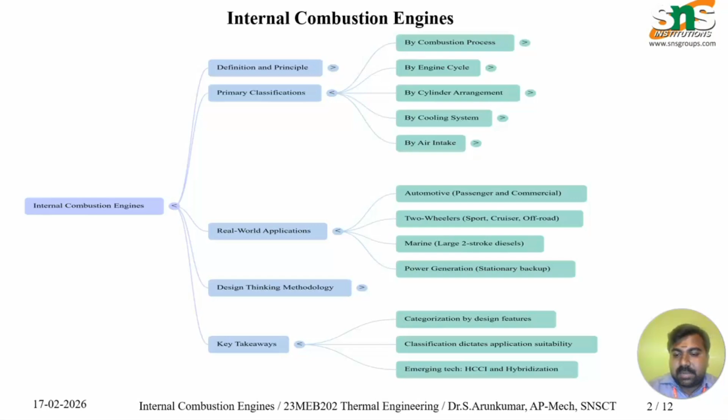And some of the real world applications like automotive, passenger and commercial vehicles, two-wheelers like sports, cruiser and off-road vehicles, and marine and power generation, stationary backup applications. Followed by the design thinking methodology and some key takeaways like categorization of design features, classification dictates application suitability, and emerging tech hybridizations.

So first, we need to know what internal combustion engines are. An internal combustion engine converts the chemical energy from the fuel into mechanical work through combustion within a confined chamber. The confined chamber is called the cylinder. This process generates high pressure gases that drive the piston or rotor, producing rotational motion.

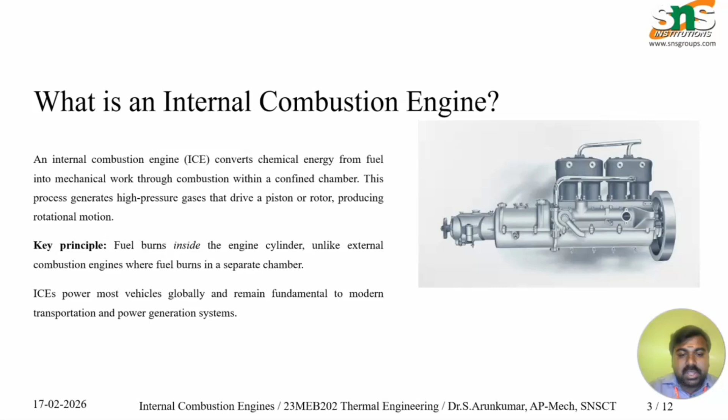One key principle is that fuel burns inside the engine cylinder, unlike external combustion engines where the fuel burns in separate chambers. In internal combustion engines, the combustion takes place inside the cylinder; spark ignition petrol engines and diesel engines are the best examples. In external combustion engines, the combustion of fuel takes place outside the cylinder; examples are power plants and steam turbines. Internal combustion engines power most vehicles globally and remain fundamental to modern transportation and power generation systems.

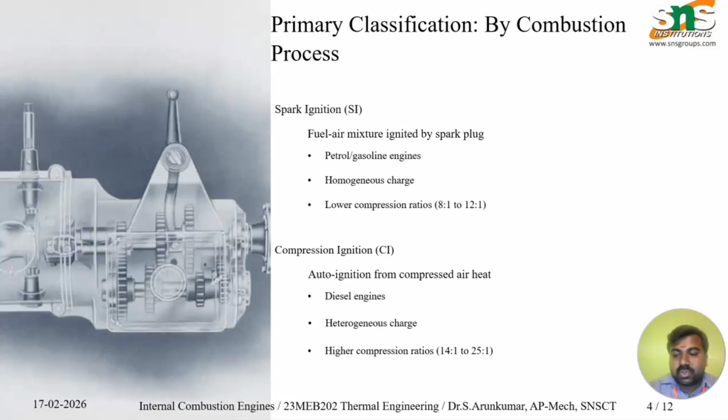Based on the combustion process, internal combustion engines are categorized into two types: spark ignition, SI engines, and compression ignition, CI engines. Another name for the spark ignition engine is petrol engine, and for the compression ignition engine, diesel engine. In SI engines, the air-fuel mixture is ignited by the spark plug. Petrol or gasoline is used as the fuel, with homogeneous charge and lower compression ratio, ranging between 8:1 to 12:1. In compression ignition diesel engines, there is auto ignition from the compressed air heat. Here a fuel injector is used. Diesel is the fuel, with heterogeneous charge and high compression ratio ranging between 14:1 to 25:1.

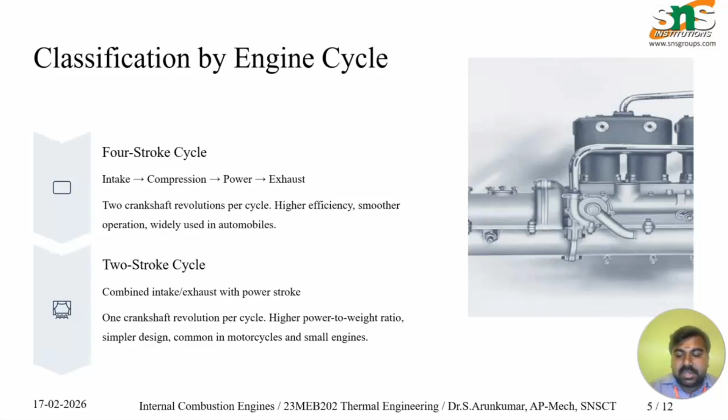Classification based on the engine cycles has two types, the 4-stroke cycle and the 2-stroke cycle. In the 4-stroke engine, each stroke is completed by half a revolution of the crankshaft: intake, compression, power and exhaust. The 4-stroke cycle has 2 crankshaft revolutions per cycle, higher efficiency and smoother operation, and is widely used in automobiles. The 2-stroke cycle combines intake and exhaust with the power stroke, 1 crankshaft revolution per cycle, a higher power to weight ratio, and simpler design, common in motorcycles and small engines.

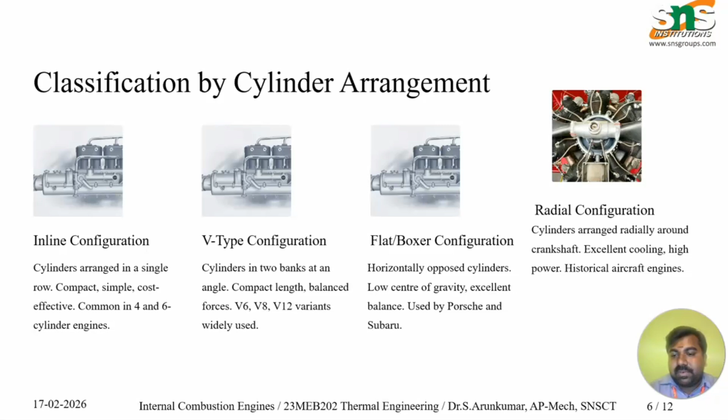Classifications based on cylinder arrangements have 4 types: inline, V-type, flat or boxer, and radial configurations. In the inline configuration, cylinders are arranged in a single row; it is compact, simple, cost effective, and common in 4 and 6 cylinder engines. In V-type configurations, cylinders are in 2 banks at an angle, with compact length and balanced forces; V6, V8 and V12 variants are widely used. Flat or boxer configurations have horizontally opposed cylinders, low center of gravity and excellent balance, used by Porsche and Subaru. Radial configurations have cylinders arranged radially around the crankshaft, with excellent cooling and high power, applied in historical aircraft engines.

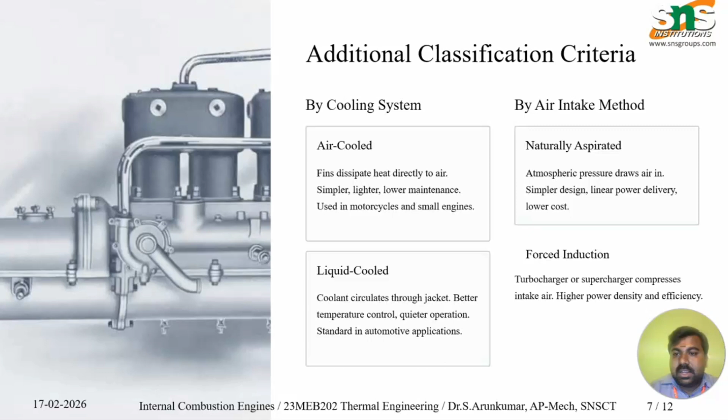Additional classification criteria are based on the cooling system, air cooled and liquid cooled, and based on the air intake, naturally aspirated and forced induction air intake systems.

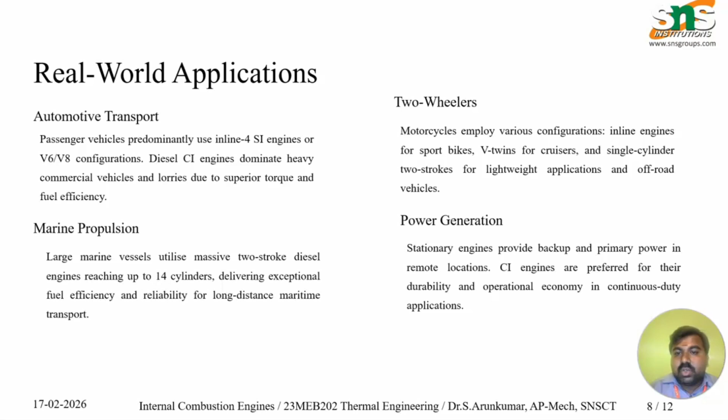Some of the real world applications are automotive transport. Passenger vehicles predominantly use inline 4 spark ignition engines or V6, V8 configurations. Diesel compression ignition engines dominate heavy commercial vehicles and lorries due to superior torque and fuel efficiency. In marine propulsion, large vessels utilize massive two-stroke diesel engines with up to 14 cylinders, delivering exceptional fuel efficiency and reliability for long distance maritime transport. Two-wheelers and power generation are other real world applications.

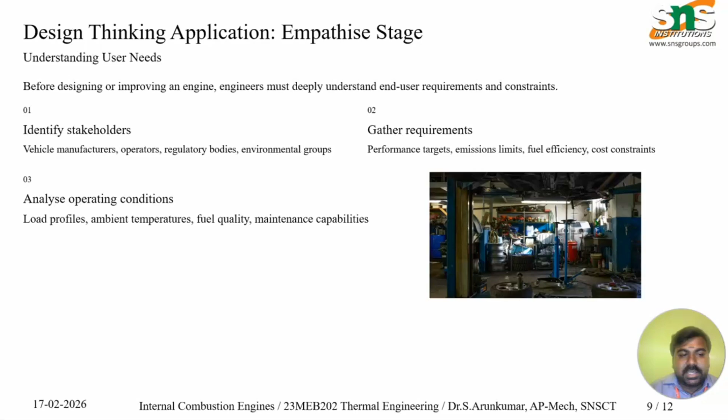Coming to the design thinking approach, the empathize stage: understand the user needs before designing or improving an engine. Engineers must deeply understand the user's requirements and constraints: identify the stakeholders, gather the requirements and analyze the operating conditions like load profiles, ambient temperatures, fuel quality and maintenance capability.

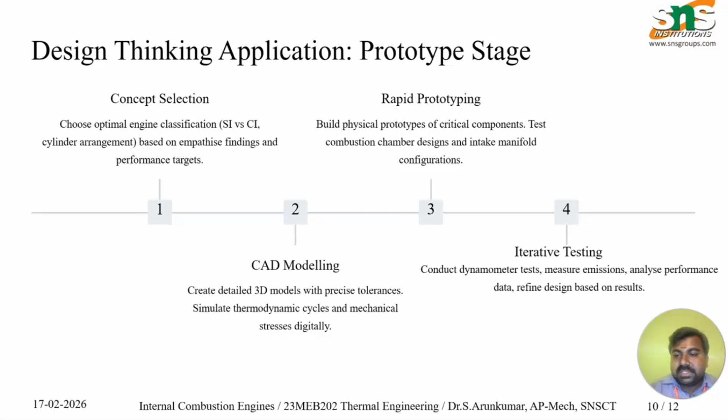In the prototype stage, concept selection chooses the optimal engine classification, whether spark ignition or compression ignition, and cylinder arrangement based on the empathize findings and performance targets. Rapid prototyping builds physical prototypes of critical components, testing combustion chamber designs and intake manifold configurations. Finally, iterative testing: conduct dynamometer tests, measure emissions, analyze performance data, and refine the design based on the results.